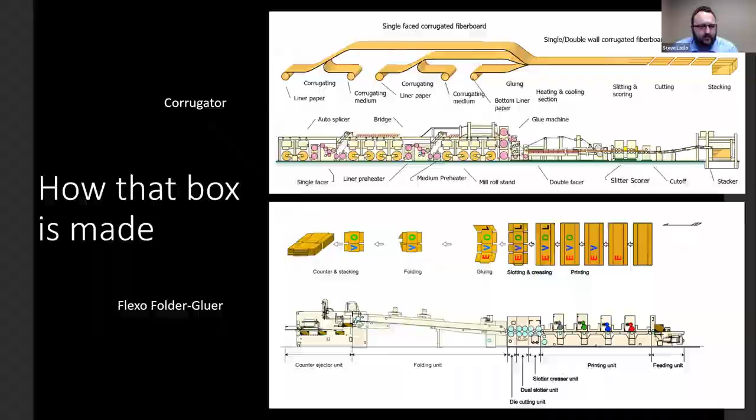So why augmented reality? We got our start working with augmented reality around 2016, around the time Pokemon Go was very popular. A lot of people in the AR community have probably heard of that. With the popularity of that, a lot of people started looking at what you could use that same technology for in an industrial environment. That's kind of where we got our start.

The way we looked at it differently, perhaps than some others, is we wanted to use it as both an internal and an external resource, and offer that as a product to our customers so they could benefit from the same kind of internal training resources that we develop to train our team.

Next slide, please. So some of the challenges we're thinking about when developing this program: on-the-job training is very expensive and time-consuming. That used to be our primary form of training our field service technicians, and we're in a transition point now where we're trying to use this new technology to leverage training tools to bring them up to speed faster and use a little less on-the-job training.

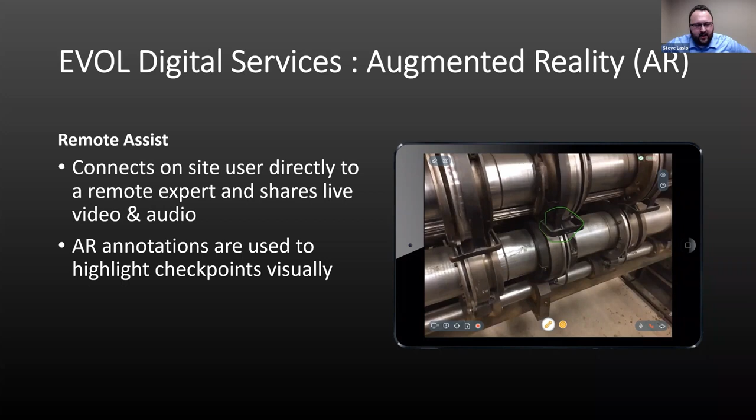As far as work instructions, that's what I think is really the most flashy and impressive part of this. As we continued developing the program, we managed to get the 3D models. When we actually started, we didn't even have the 3D model of our equipment. But as we started to show some signs of success, we were able to farm out some of the older 2D CAD models and have them converted into 3D models so we could import that into the platform and start developing these reference materials and step-by-step procedures. The nice thing is that it doesn't just explain how to perform a certain task, it actually animates those instructions, and it helps the user better understand a much more complicated process if they can see it happening.

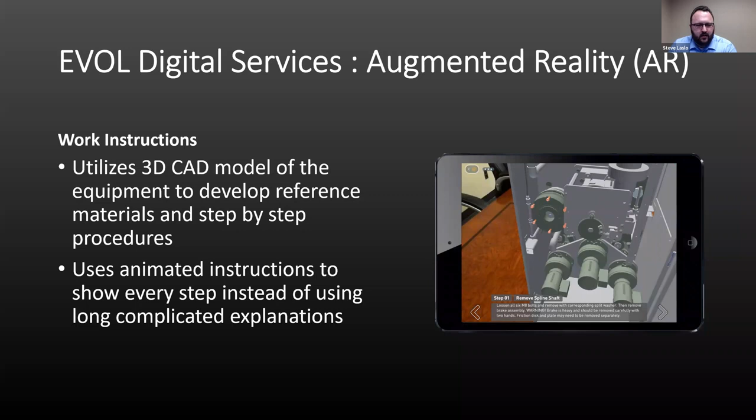So here's a quick list of all of our procedures that we started out with. We started trying to create the low-hanging fruit, as it were, for the procedures we had available to us. So we started with a lot of the gap and limit calibrations on our machines. What that does is we use potentiometers or encoders on the equipment to determine the home position of every axis on the machine, and from there it has to be set up to a particular place in order for, for example, the knives to hit that box in the right position to cut the slots out and then pass it through to the next section.

So what we first started building is all the limit adjustment procedures and the gap calibration, because those aren't particularly difficult to animate. We're not talking about a whole lot of different parts that have to move. We're basically taking previously existing procedures that we had in PDF form and converting them into an AR format, just so we can get them out there and at people's fingertips easily.

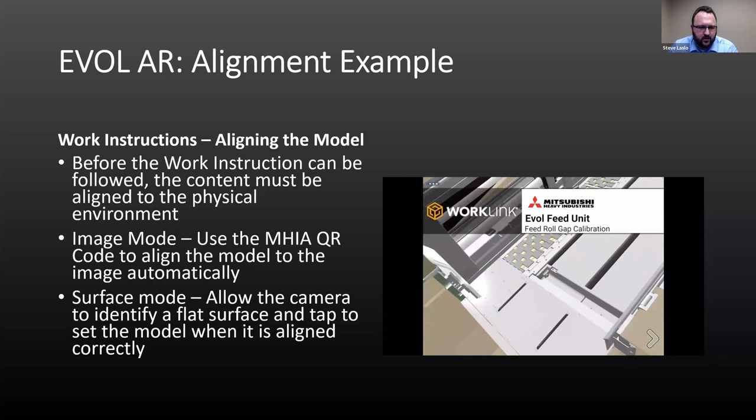First thing they'll do is align the model, and within that you have two different ways of doing that: an image mode and a surface mode. The first part here shows image mode, where you have a QR code that automatically places the model - this is the feed unit of our machine. Once you've placed that model, you can follow the instructions and walk around it. Surface mode allows the camera to identify the surface and set the model on that surface once it identifies a flat place for it to position itself, and then you tap the screen to confirm it.

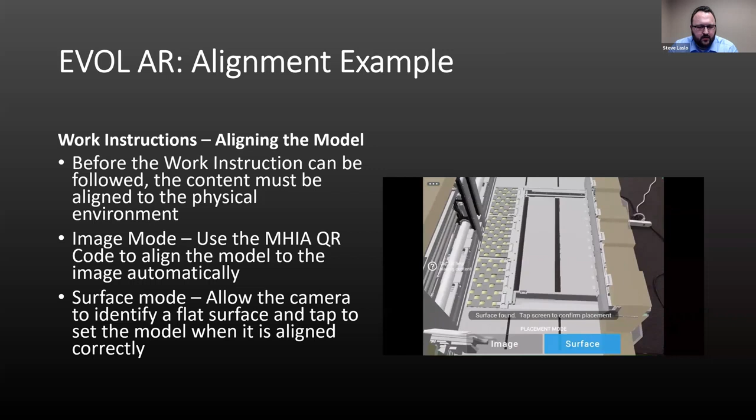So this is what we're doing with a smaller scale model of our machine. We focused initially on a classroom training kind of environment. A lot of the newer functionality with augmented reality allows you to use the instructions on the actual equipment in person, but we were a little concerned going into it that there might be potential safety concerns with our customers. We weren't sure, with this being a new technology, how well it would be adopted yet. So we wanted to start with building a classroom training kind of environment tool that can be used.

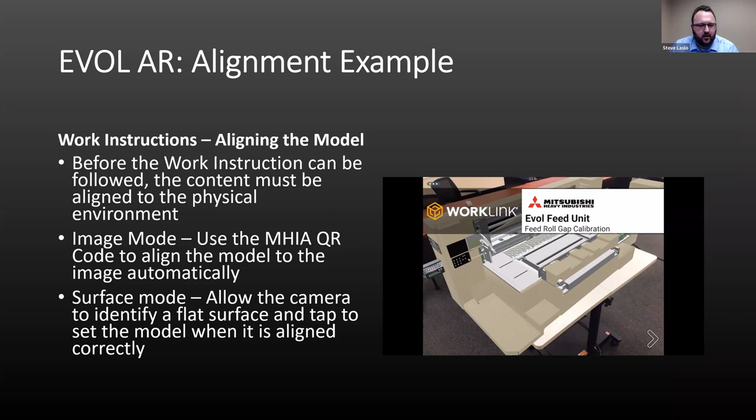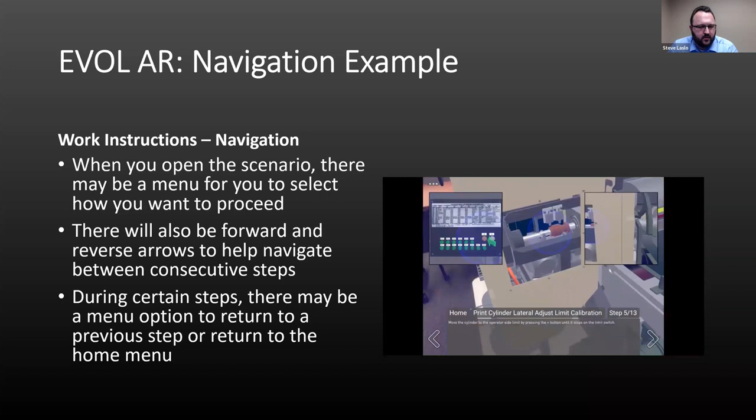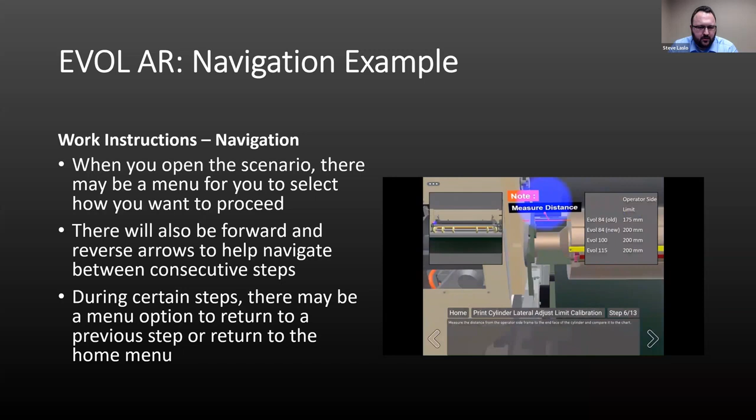Once you have the model placed, you can use the arrows to navigate back and forth through the steps of the procedure. You'll often have a main menu where you can select different options. So what I'm showing here is our print cylinder lateral adjustment - these are limit switch adjustments that you need, to be able to have the motion stop at a particular location so it doesn't cause mechanical interference between two parts.

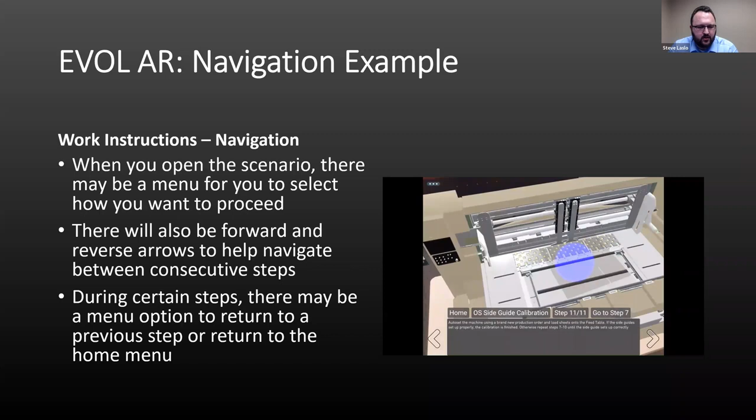So what we can do is use that to demonstrate visually how to adjust that limit switch in the right position.

Within a lot of our procedures, and this is something I really like about the WorkLink specifically, is we have these pop-out sections of the machine that we can animate in a close up, or we can provide a chart.

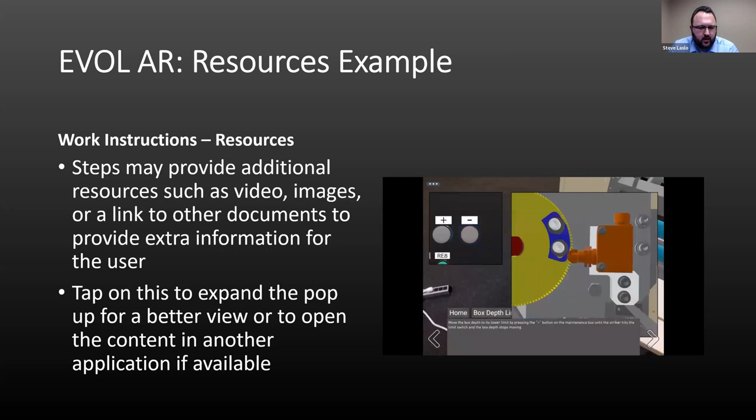With the EVOL platform, we have multiple different size machines, and that means it'll handle a different variety of box sizes that run through the equipment. But that also means the calibration procedure is a little bit different from one machine to the next. So having a pop-out chart that shows the different measurements depending on the machine type allows us to use one procedure to represent multiple different machines without having to load in the exact different model of the equipment, and move forward developing the procedures without that.

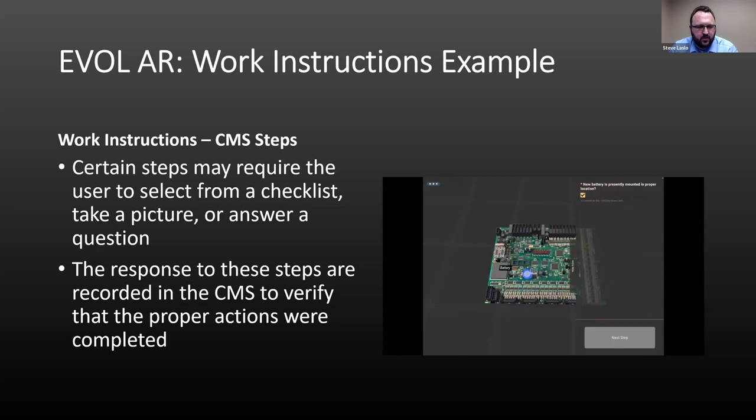Some of these procedures also include what I'm calling CMS steps. I'm not sure what the official term is, but it allows you to click a checkbox and record that certain steps were completed. It allows you to remote verify specific tasks were performed. So if you have an approval process for particular procedures, this allows you to give confirmation and take a picture, for example, to show you've completed a certain part of that step before you move on to the next step of the procedure.

Some of the other menu options: you can align the project, and if it gets off, use the standalone device mode. What I'm showing here is our counter ejector, the part of the machine that takes the bundles, counts up every box, and ejects a certain number per stack.

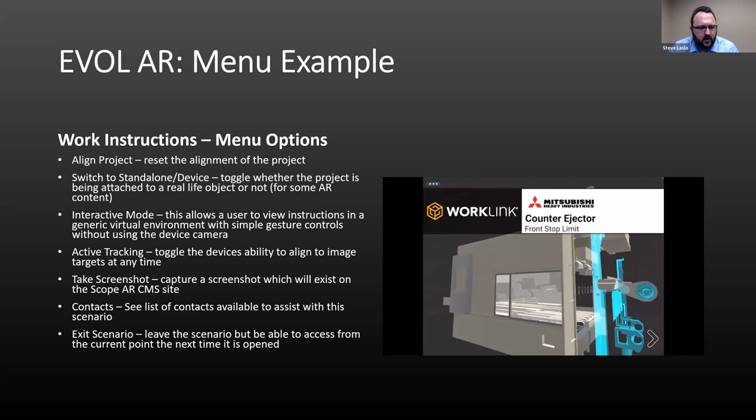You also have the option to go between interactive mode, which really allows you to take it onto the machine. So what we started with was more of a classroom training environment, and using interactive mode allowed a nice easy transition to actually using the smaller scale model at the machine as a reference material. You can use standard gestures on an iPad or Android tablet to zoom in and out and scroll around, which allows you to use it as a more advanced maintenance manual for our equipment.

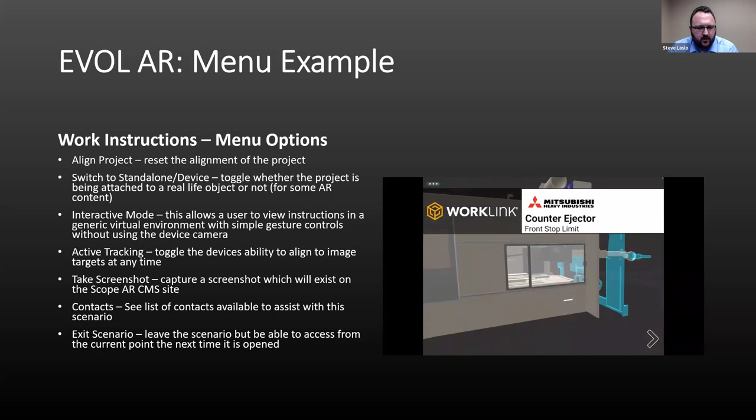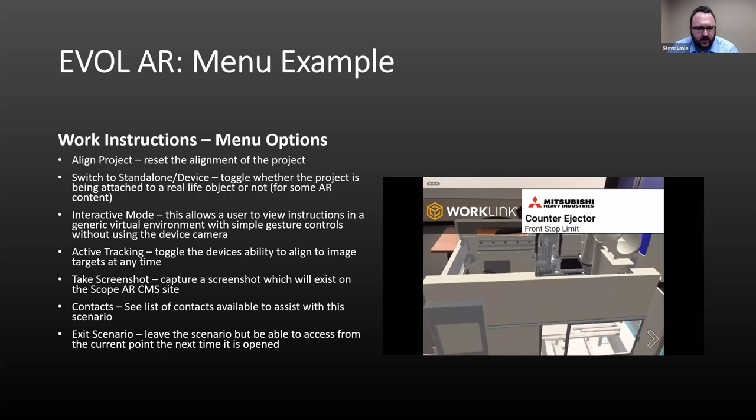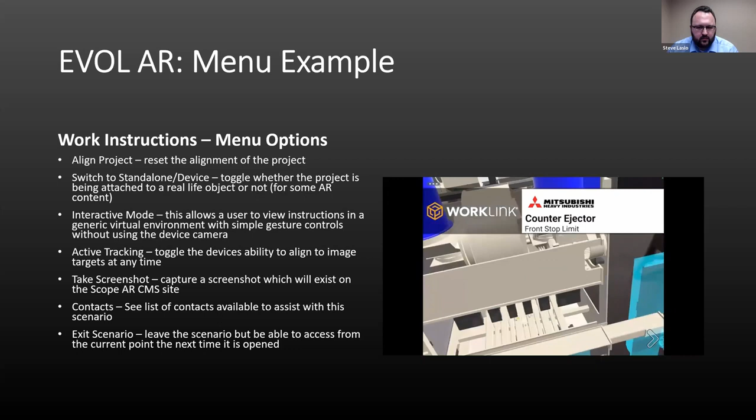So with the actual augmented reality, you place it on the table and then walk around it. That allows you to use it in a classroom setting, but using interactive mode really lets us use it at the machine without having to scale up the project to full augmented reality instructions on the equipment.

We want our customers to be a bit more self-reliant and able to use this as a tool to solve the problem before reaching out for customer service. But we also want that when they do need help, they have a quick, easy way to reach out to our customer service team. And we want to standardize the process of all these complicated procedures by capturing a lot of the expertise of our senior workforce and using that to benefit our new employees.

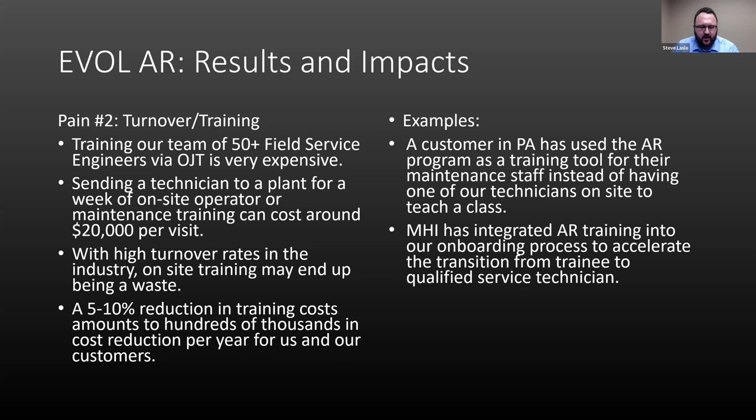In terms of emergency service, that's probably one of the most expensive parts of operating a service business - when preventive maintenance has failed and you have to send somebody on a plane to fly across the country to solve a problem. One example of us being able to solve a customer's problem was...

A particular customer who was signed up for our digital service program that includes the AR platform was having a problem with their folding rails on the EVOL. Simply by providing a procedure for them to perform that task themselves - which historically had required a service visit because it's fairly complicated and sometimes difficult for a maintenance technician without experience to perform -

They were able to save themselves the cost of having a technician fly out to the plant to solve that problem. That alone pays for the program subscription. So, next.

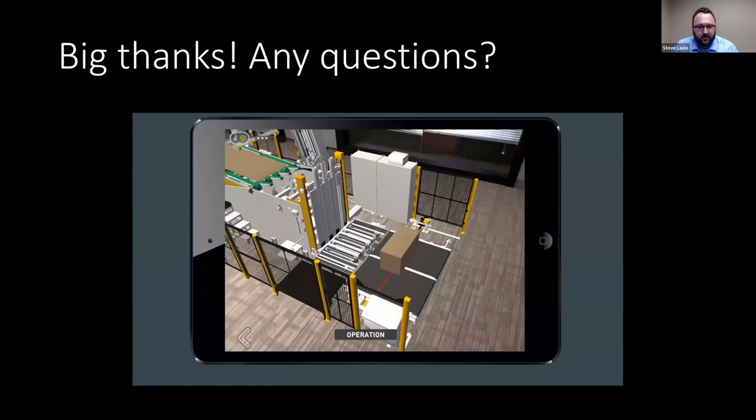That's kind of my quick overview of our journey from a small proof of concept into a much more fleshed out program. We're still definitely developing more and more content, and we have a lot of ideas of where we're headed with this program in the future.

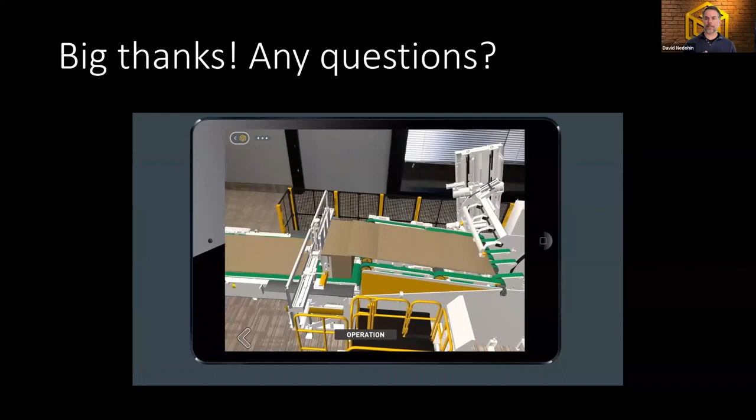Yeah, that's awesome. Thanks, Steve. This was great to see the evolution in terms of where you started, what the vision was, some of the use cases you're talking about, and the costs - obviously the importance of those to your organization. I think the use cases you pointed out are universal.

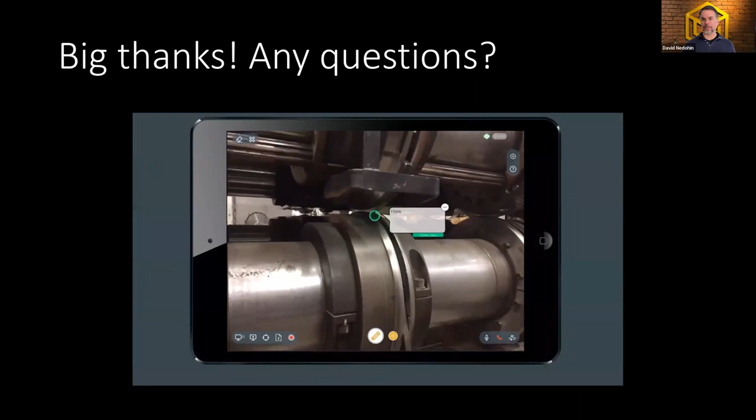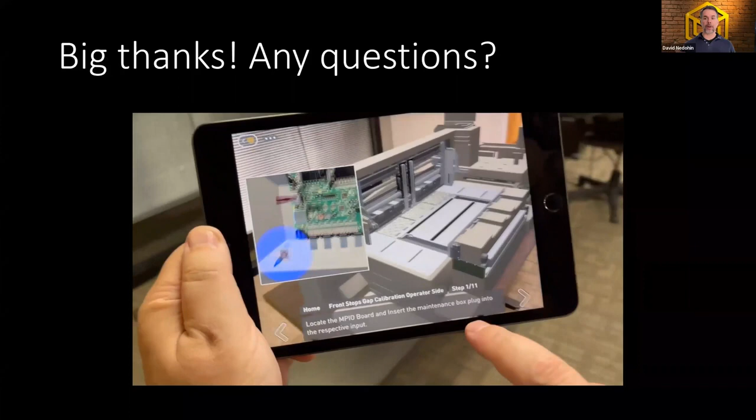When you mentioned the cost of training somebody, it's something every one of our customers and probably everybody on this call is experiencing in one way or another. We actually had one customer that shared that over a year they trained 3,000 employees, and by the end of the year they were net positive 300 employees. So when you think about the cost of training employees who are remote, flying them into different locations, needing to put equipment in their hands - it's not always there and available.

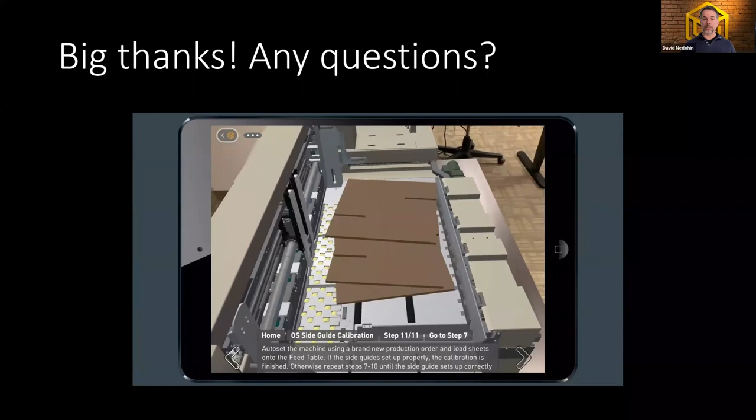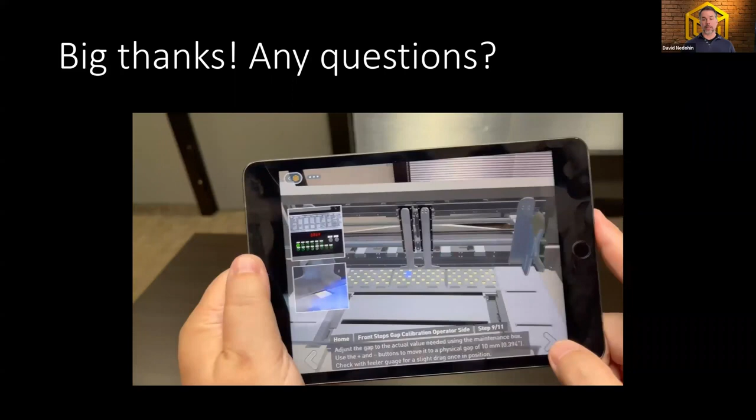How do you do that? I think there's a bunch of studies that were done recently that show that cost was somewhere in the range of $25,000 per employee to train them. So extremely, extremely expensive problem. I'm sure that's something you guys thought lots about in terms of starting points for this and the impact that you might have.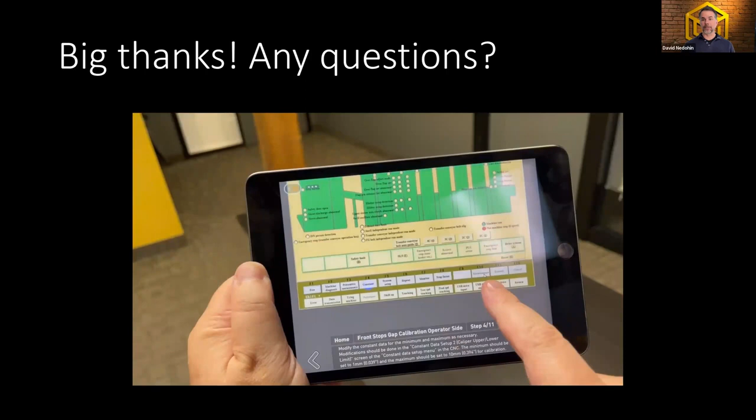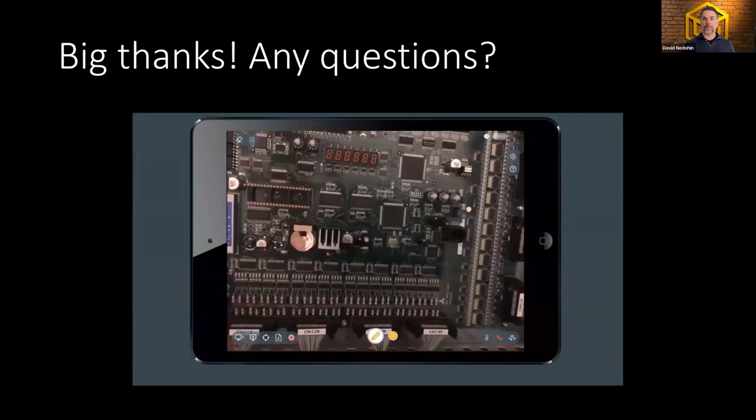Yeah, definitely. So there's a number of questions that have come in. It looks like there's some really great ones here that you might want to talk to. I can certainly jump in on a few as well. If anybody has additional questions while we're answering some of these, just put them into the Q&A, and we'll try to get through as many as possible.

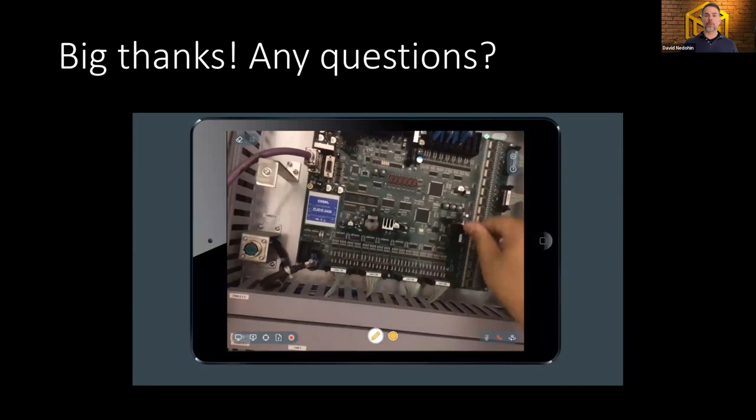There's a question - I think Fran sent in a couple questions that are both related, so maybe I'd love to get your thoughts on this. The first one talks about handheld devices, iOS or Android, which obviously WorkLink supports, as you mentioned, both the handheld devices and HoloLens, different use cases, right?

The question was, how are the people in the field using those devices for troubleshooting when they need to hold that device with one hand? I know you talked a little bit about it, but maybe touch on that. And the second part was, are people accepting of the less immersive experience, or have you tried even the HoloLens? Get your thoughts on that.

Yeah, so we actually just recently got a HoloLens, and I really like that technology, being able to have it as a wearable. We're really getting to that point now where I think the wearable device is going to be quite popular as an option. We wanted to initially start out with something everyone's already familiar with, and then eventually transition that direction.

As far as having one hand used while you're trying to turn a wrench on a machine, one of the things that's nice is when you have the tracking QR code, you can set the tablet down, go in, disconnect whatever it was, kind of come back if you get stuck and need the next step, and then pick it up and point it at that QR code, and it realigns the model very quickly and easily. So even if you have to go back and forth a little bit, they're already kind of used to having to do that with a maintenance manual or a printed PDF instruction that they have to use as a reference for performing a certain task. That's a problem that's already kind of inherent in the existing world.